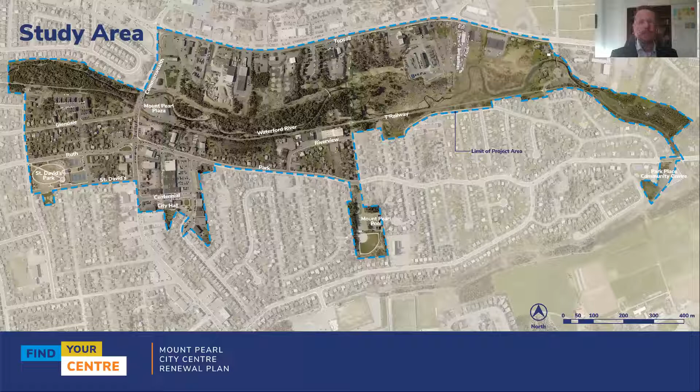So this is a look at the study area. It's the area that has been defined as the city center area. It's a little bit of an abstract shape, but it was defined based on resident input as well as location of key features within the city center area, such as St. David's Park, the Waterford River and the Trailway, and important public buildings such as City Hall, Park Place Community Center, and the former Mount Pearl Pool. So for the purposes of this plan and for tonight's discussion, when we say city center area, this is the area that we are referring to.

You'll probably recall a few moments ago I suggested that an important aspect of the city center plan is defining the vision for what the city center will become. And the vision, of course, is not ours to craft alone. We rely upon the expertise of those who know the city the best - municipal leaders, city staff, community groups, and residents, those who live and love Mount Pearl. So as Mayor Aker alluded to a moment ago, we did quite a bit of extensive engagement on this project - actually several months worth of engagement.

You can see that there was a cluster of key stakeholder groups which we worked very closely with - city staff and council. Of course, we discussed and met on several occasions with those folks. And of course you residents, you participated or remember participating in this project back in May or June around this time last year, and we had several different ways for you to get engaged. What we did is we collected a lot of feedback, and it was really, really useful feedback. And what we do with that feedback is we take it in, we analyze it, and we use it to develop a set of core guiding principles. For the city center plan, there were 6 principles in particular, and I'd like to take a few moments to speak to each one of those.

The first one is build strong linkages. What we heard in speaking with all those different user groups is that there's a need or a want to improve vehicular, transit, and active transportation connections, so walking and cycling. I think we all intuitively understand that the city center area contains a lot of really great features - Centennial Square, St. David's Park, the river, the trailway - but these can feel somewhat disjointed and a little bit challenging sometimes to move between. So through this city center plan, we want to create stronger linkages that connect those pieces in an appealing and inviting manner, to unify the city center area and ensure that the experience remains inviting and positive.

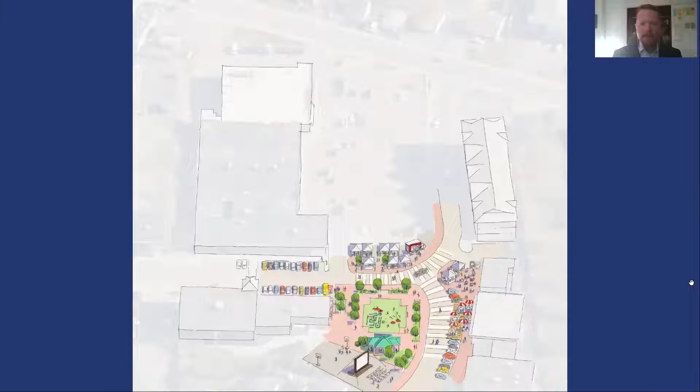We envision the changes to happen over time. Initially, the city may consider installing temporary pop-up kiosks, closing off sections of the street or parking for pop-up patios or vendors, and hosting pedestrian-only days, those sorts of things.

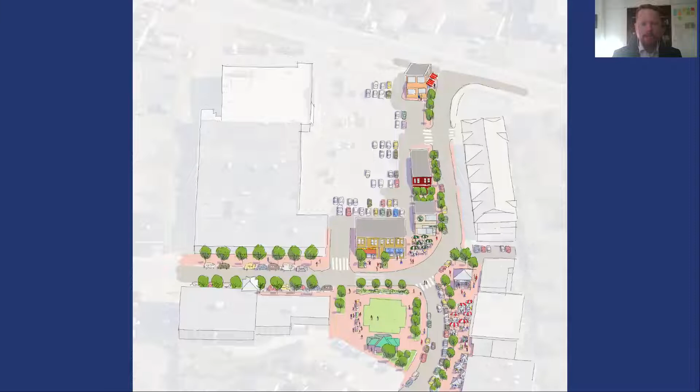In the midterm, we see parking begin to get reconfigured to allow for more generous sidewalks, and small buildings begin to establish a bit of rhythm to the streetscape and a stronger street edge, as well as opportunities for walk-up retail.

And then finally, in the longer term, larger mid-rise buildings begin to fill in. Parking gets incorporated into these new developments, and a series of pedestrian laneways and streetscapes begin to emerge.

This is another area we identified as an infill or intensification opportunity. Most of this property is privately owned. However, in conversation with the landowners, we found out they've been exploring alternative uses for their properties, and had even hired a consultant to help come up with a vision.

So what we did was take that consultant's plan and, using new information such as topography, floodplain mapping, and the new city center area guiding principles, we attempted to develop a new vision for the area. Starting at the river and working upslope towards Topsail Road...

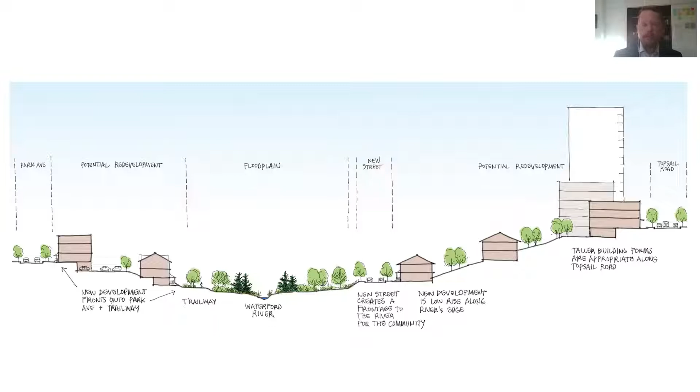This is a cross section illustrating what that would look like if you took an imaginary slice through that developed land. You can see the river, and everything now faces the river instead of backing onto it. The Waterford River really becomes that shining gem.

And this creates an opportunity for a larger intervention, such as a riverside park, an opportunity for people to get down and really enjoy and celebrate the river itself.

Those familiar with the location will probably recognize there are several homes currently here. This plan, being a long-term vision, suggests the city consider acquiring these properties if they become available, because they're located in a floodplain, which is not ideal, especially as we face ongoing challenges with climate change and more frequent weather and storm events.

So instead, this plan envisions removing those buildings and replacing them with what we call a resilient use. That's just a fancy way of saying it's a use that's able to withstand the ebbs and flows of severe weather events such as flooding, and then bounce back without the need for a whole lot of investment or fully rebuilding.

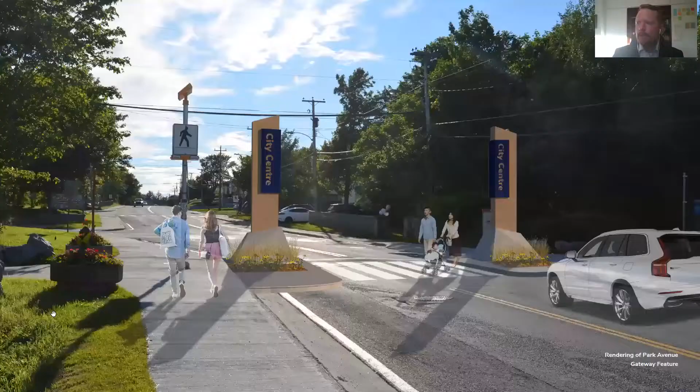Sure, thanks, Zeta. And you're right, I did say stairs. I'm happy to report the only location where we've proposed any stairs currently is at Twin Falls, and that was where I said stairs, and that's because right now it's a really steep slope which you need to scramble down, and there's really, unfortunately, no other way to get down there other than a set of stairs. That said, I'm just going to flick back onto the overall drawing there, and hopefully not make anyone dizzy. But the beauty of the city center area, the public spaces within the city center area, is that they are already relatively low grade. Grade is oftentimes one of the biggest challenges to accessibility, for sure.

All of those are envisioned to be accessible. And accessibility, of course, is really important in everything we do because we want city centers and cities on a whole to be open, welcoming, and inclusive of everybody. That said, in this particular project, we didn't get down to the level of detail such that we can say with 100% confidence that everything will be 100% accessible.

Every development that happens moving forward in the city center area, the developer of that property will be responsible for illustrating to the city how they've made provisions in their plans to ensure accessibility and inclusion are of utmost importance. So the principles of accessibility and inclusiveness are in the city center plan. There's actually a whole section on that. I didn't really touch on it tonight in the interest of time, but I can assure you the principles are embedded in the plan. As developments happen moving forward, the onus will be on developers to illustrate how they've done their best to ensure accessibility is incorporated in their work.

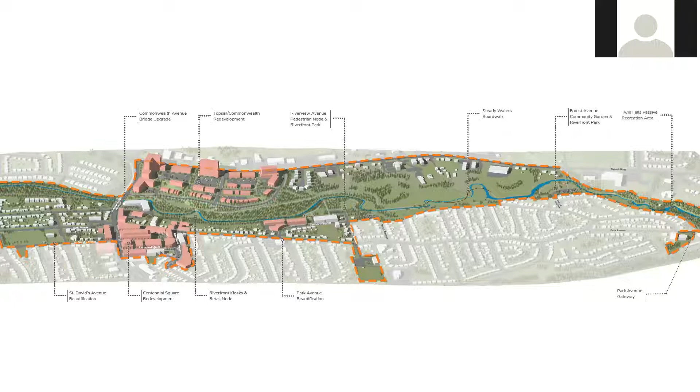I have, thank you. It's an absolutely beautiful plan, I can't wait to see it all come to light. And I do also agree about Commonwealth Avenue down by Piper's - that's extremely dangerous, and that's well warranted. Any idea when that might get started? Because one of these days, someone's going to actually get clipped down there. It's going to be a bad accident.

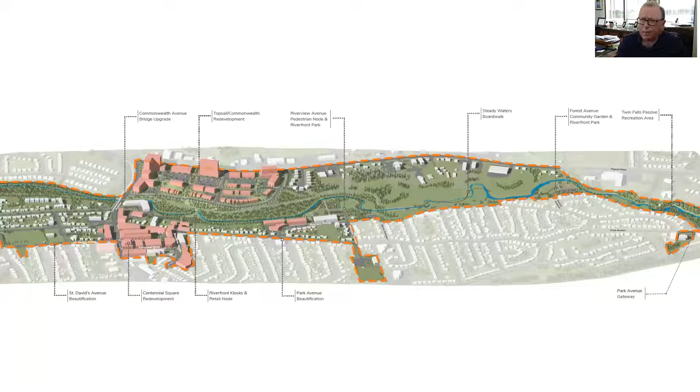So we don't intend to see the city center divided by a 4-lane highway - we intend to join it up. Now, how that happens won't be planned overnight. That's going to take a significant capital contribution, and our engineers have already offered some ingenuity. It may not require a bridge, but it might require, for example - and I'm not saying council's committed to this, Sandra - it could include an island way, a concrete island where you cross 2 lanes at a time.

And then the light that's on Commonwealth Avenue at Park and Ruth would be coordinated so that when you're a pedestrian along the trailway and you press the walk button, that would also coordinate with the lights there to slow down the traffic.

But to make it safer, you'd only go to the island before you cross the next two laneways. Do you know where I'm coming from, Sandra? Yeah, yeah. So that may turn out to be a lot cheaper, but it's been raised before.

Perhaps the city was designed from a very car-centric point of view, and one of Mount Pearl's greatest assets in terms of its residential subdivisions and business community, especially Donovan's, is the roadway network we have here, both getting in and out of the city. It's rare for somebody to talk about Mount Pearl being full of traffic jams like other communities, so it needs to be more than tweaked. We need to make the best of both worlds.

And I know the deputy mayor has been a real champion in the past of a transportation study. Matthew's talked about active transportation. We're here tonight to listen and get endorsement, and we'll have to continue this process perhaps over the summer. But there is a way of crossing that roadway.

But most people don't follow what we would like them to do, which, by the way, if you go to other communities like Gander or Bishop's Falls, you don't always get to cross exactly at the same point in the road. But if there's more people going to be using bikes and more people walking and hiking, as we've seen during the pandemic, I think we can gladly justify somehow — I won't use the word bridge, but we'll be able to bridge Commonwealth Avenue in a safer way. So I'll stand down, and that's my commentary.

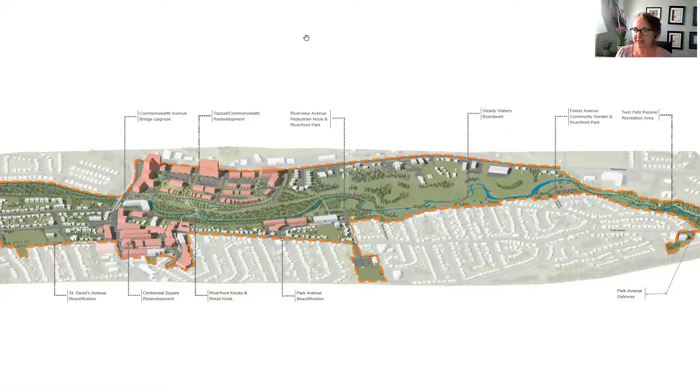Oh, for sure. Thank you, Councillor Fry and Mayor Aker, and thank you, Sandra. I'm just looking at the time — I don't see any other raised hands. Rachel, is there anything in the Q&A box? Nope, nothing that hasn't been addressed. Okay, excellent, well, it looks like we're right on schedule.